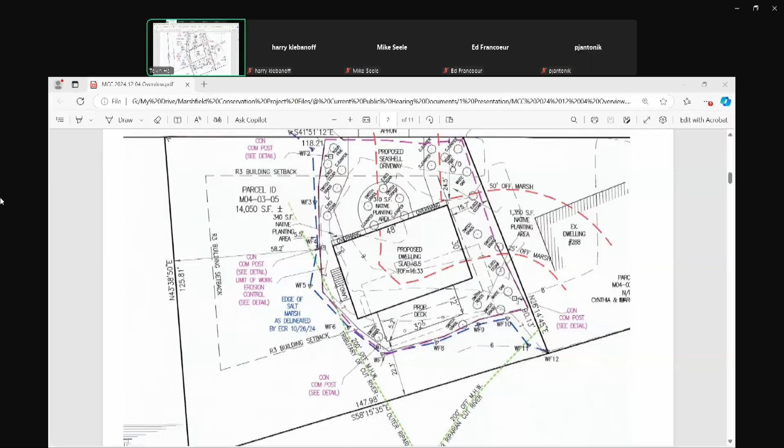General conditions 1 through 18 are standard special conditions. Prior to construction, condition 5 and 2, ensure erosion controls in place and have a pre-construction meeting. During construction, condition 11, maintain best management practices. After construction, condition 1, to file for a certificate of compliance and provide an as-built site plan. Erosion control, ensure that erosion control is in place throughout the duration of work, and also the piece about the 4 conservation markers. Okay, thank you.

Okay, I vote to close the hearing and issue the order of conditions to include the conditions listed by Mike. All in favor? Aye. Aye. Can I have a second? Oh, I did that wrong. Second. Sorry, guys. I'm still in favor, though.

It's a good way to start it off. And I read the legal ad, but actually I didn't have to because it's already open. Yeah, I was wondering about that, but, you know, okay. Oh, we got through it. Autopilot, it's the snow.

Okay, next up is 1187 Ferry Street. This is a new hearing. In compliance with General Laws, Chapter 131, Section 40, the Wetlands Protection Act, and Code of the Town of Marshfield, Chapter 294, Wetlands Protection, a public hearing will be held by the Marshfield Conservation Commission on Wednesday, December 4th, 2024, to consider the request for an amended order of conditions for 1187 Ferry Street, and the hearing officer is Vice Chair O'Donnell. Thank you. Mike, all the administrative things in order? All administrative requirements have been met.

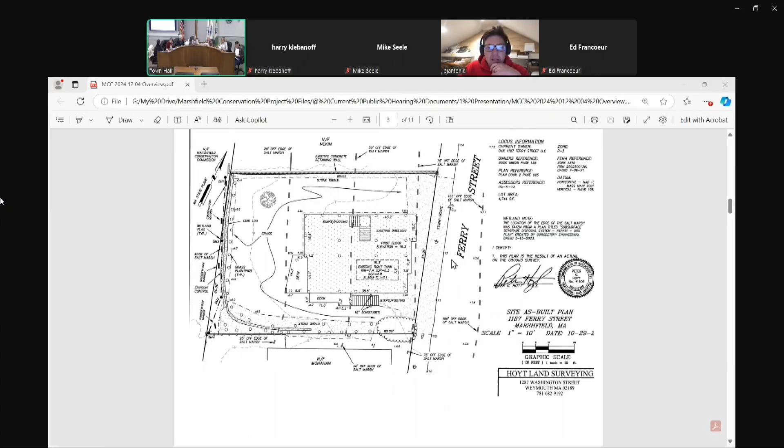Would you guys like me to kick it off here? Yes, please. Okay, Mike, would it be easier if I shared my screen? Yep, just let me grant you permission here quickly. You guys are speeding along, I was almost late. So unfortunately, it looks like they took away the ability to have you present or share your screen via Zoom. Okay, no worries. Would you like me to show anything in particular? I have the as-built site plan. I would go back a little further. Is this the packet I sent in?

Yes, I can pull the full packet up too. Well, you know what? I can work on this. Don't kill yourself.

So, as you guys are aware, we did some pretty extensive work on this. Thank you, everybody, for helping me out on the first round. So we're done with the project. We sold it, which is great. Took a little longer than expected, but it is sold. And so there were a couple things that differed in reality when we put the site together.

The first was, you'll notice on what I'll call the north end, so the right property line, we did add some gravel along that wall, specifically because when we were installing, there was a pretty large rainstorm and the water was coming off the road and kind of pooling. And so by adding that stone, it redirected it and it flowed through the stone nicely and just got through the property without pooling up on the grass.

So that was a natural way to get the rainwater to flow through the property, because as you know, we're the lowest spot and it grades down the way that we had discussed back in the day. Along with that, the leaders on each corner of the property are the top right, the top left, and the bottom left corners of the building. I just ran a simple ADS pipe over to the stone on either side to get the roof water into the stone as well. That wasn't discussed at the beginning, but again, trying to avoid pooling of water.

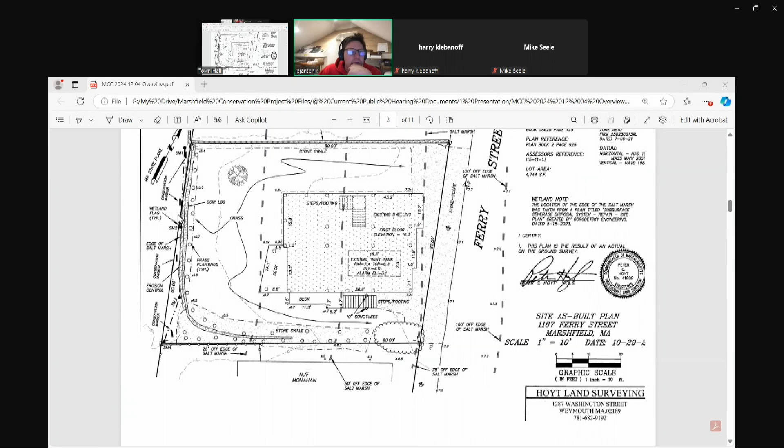The only other thing, and Mike, if you could show the approved plan, please. You'll notice here where the coir log is. So after installation, I realized that there was an error on this print. That coir log I had requested my engineer to put along the back property line where the silt sock was, and he never showed the silt sock here, so I just assumed that was the back property line. When in actuality, now Mike, if you go back up, the silt sock from the beginning was always along this far edge of the property, and he did indicate it here on the as-built, the erosion control. So I built it the way that I described to him, but then afterward realized that he had placed it in the wrong spot on the plan.

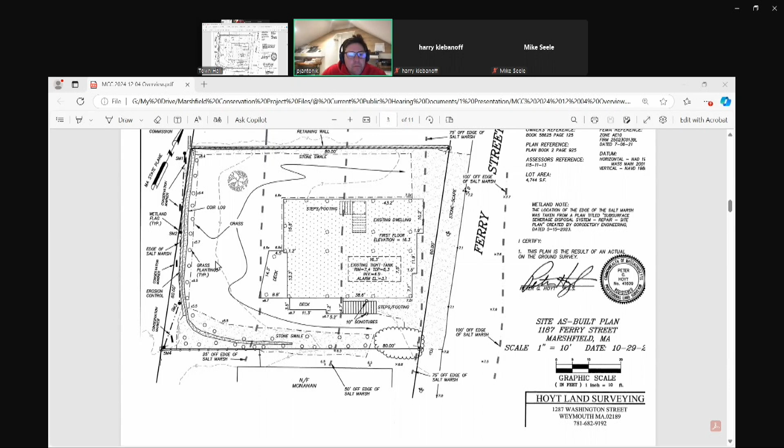But regardless, the grading is as agreed upon. It's just the location of that coir log, and the planting is a little bit further back, about 4 or 5 feet. Maybe in the corner it's close to 9 feet, but it really doesn't change too much. It's still grass, and actually the height of the top of the coir log is lower than proposed before. So it really doesn't affect anything at all, and we haven't seen any adverse effect from the rain. It has flowed through the property totally fine. And I think that's it. If there's any other questions, those were the two changes: the gravel on the top, the pipes with the leaders, and the location of that last line in the back.

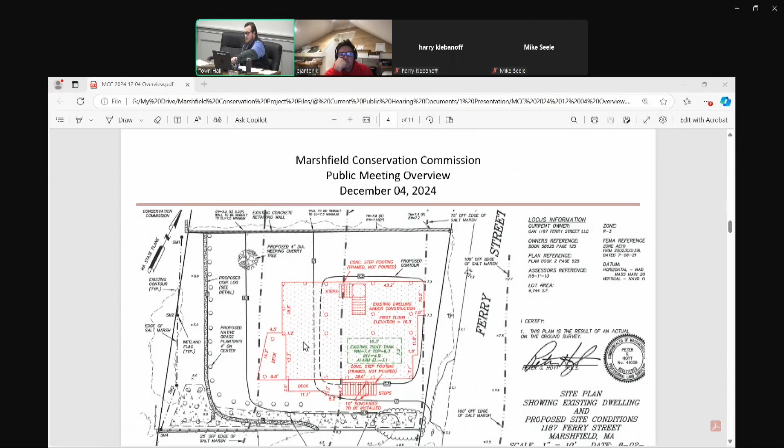Okay, thank you. Mike, your comments on this? Yeah, I went out to do a site visit with Mr. Antonik a few weeks ago. Took a look around, pointed out a few items. I went back to the office, took out the scale ruler we have, and took some measurements. Found that the backyard area up to the coir log is greater than proposed. As you can see here by the proposed site plan that was approved by the commission, there's no stone trench along the northern end of the parcel.

The elevations towards the end of the rear yard there, where there is now fill and grass material, was proposed to be at elevation 5. Now that is at about elevation 5.7, 5.6, and then at 5.4 in the corner. Also, there's no, what do you call it, diamond pier footings noted on the site plan. I know that there's a handful of them supporting the staircase. That it? Yes. Okay. Well, I'd like to start off the commissioner discussion.

I think the stone swale along the retaining wall, I looked at that today. I think that's pretty minimal. I can understand the reasoning behind that. Also, the downspouts, I don't have any issue with that. As far as the location of the coir log and the location of the buffer zone, I felt we were all aware of where that was going to be located in the course of the meeting when we discussed this all. I thought the original proposal was to have it even further out, but to have it higher so that the lot was going to be more level around the house.

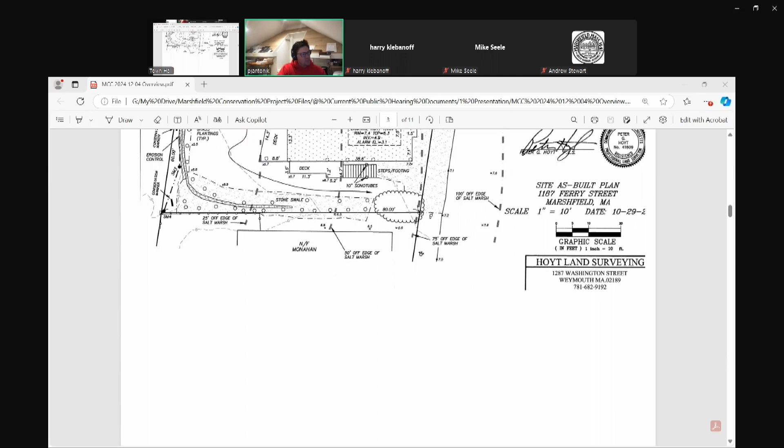So you'll see it here. Hold on. If the mic picks it up. So the page numbers might be different for you, Mike. Keep going up. Okay. It's the photos. Yeah, right there. So if you zoom in on the top photos there,

you'll see on the left the outline of the rear yard when we purchased the property, and then how it's shaped on the right. And then if you go down, I didn't get an overhead, but I got close. But it's identical to the way it was prior as far as the property line. So that silt sock was put in prior to demolition, and it still remains in the exact same spot.

Originally I told Rob to draw the coir log along the silt fence, and since he never marked the silt fence on the plan, I just made the assumption that it was the same spot and built it that way. But now looking at it, it was just wrong. It was drawn in the wrong spot. So we kept the yard exactly the same, and you'll notice it drops off significantly right at the end there.

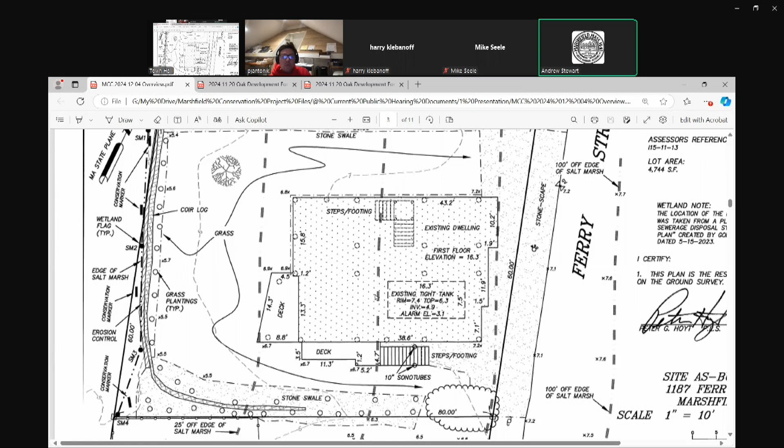It's gonna run towards the house, but it's gonna hit that 7.2 and go around it on those flow paths and through everything. It's gonna travel over everything once it gets 3 inches high, basically. Well, and the crushed stone is gonna be pervious too, so you should get flow through that, right?

Correct, but that rectangle within the footprint is the raised elevated area of the tight tank, and you can see on the outside edges of that footprint on the back top left corner, I think it's 6.8. There's an X there. At the back of the deck, it shows the 6.7. So those are the immediate elevations right around the outside of the house.

The dotted gray lines after that are the 6. The top of the coir log is showing at 5.6 and 5.5, 5.7, 5.4. And then on the other side of it is an elevation line that's 5 feet. Okay, thank you.

So I think if we're okay with the elevations and the grading, what we need to deliberate is where that buffer zone line should be and where there should be some more native plantings. I think the buffer should be where it was originally drawn. There will still be a significant amount of lawn behind the house. I don't think that's a hardship to come back to that original line and put native plantings from there to the edge of the marsh. That would be what I would want to see.

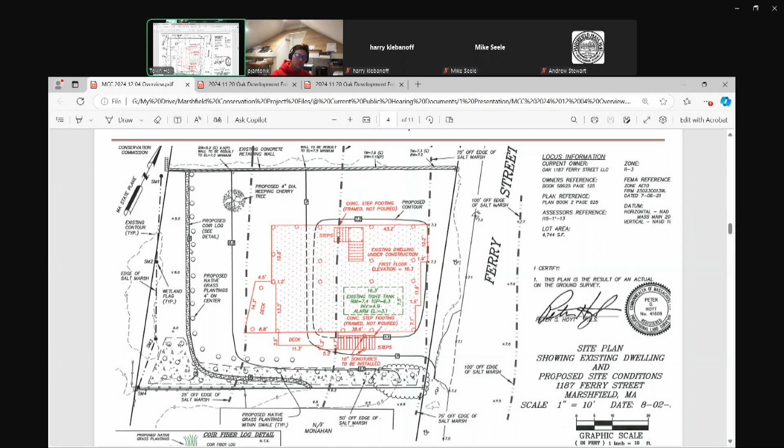Commissioner O'Donnell: if I may, the conservation posts should also be moved to where the extent of the buffer zone is. Right now they're on the lot line, which is also approximately the salt marsh line, so they should be moved back to reflect the new buffer zone area. And they're also on 2x4s, not 4x4s. They need a sturdier base.

The other thing is the Conservation Commission will supply you with the round markers. You didn't have to make your own signs. I was unaware of that, but are the round markers smaller or about the same size? They're significantly smaller. Okay, then I'll definitely take you up on that.

They're- yeah, I mean I'm conceptually fine with this. What I'll do is, I just want to get this wrapped up, right? So what we could do is, do we think the coir log is even really going to do much?

I was going to make a suggestion that the coir log stay right where it is, and we just delineate where we want the buffer zone with the native plantings and remove the sod at that point. I think that's fine. You cut it with a spade and take it right out.

So how about what I propose as a solution: I have Rob go back out and mark correctly on the lot where that theoretical log should be. And then we'll take the sod out and add a handful of plantings behind it to kind of fill in the space. I think that's a pretty easy solution.